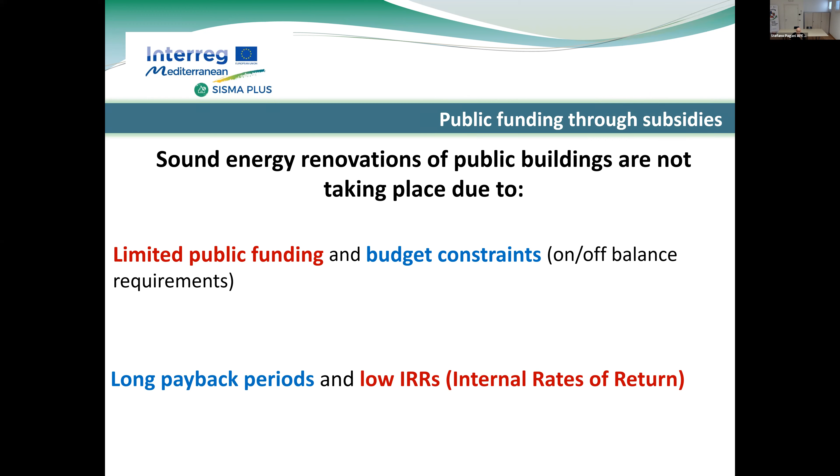And the other fact is that these kinds of investments have very long payback periods. It takes a lot of time to get your money back, and they have very low internal rates of return. So...

Our approach here is to try to tackle this problem from a different perspective, from a new point of view. The thing was, what do we need? The question is, what do we really need to make things happen? This involves another question: project feasibility.

What does it revolve around? It revolves around two things: bankability and profitability. In other words, when certain ECMs - energy conservation measures - are carried out on a building, such as external insulation of the envelope, window replacements, insulation of the roof, and so on. These are the basic things.

This obviously costs money, right? This implies a certain expenditure, and that expenditure at the initial period will then yield savings over the years. We will spend less money on heating. Therefore, in financial terms, a trade-off has to be made between the amount you have to initially spend to carry out the investment, and the savings over a long time. We have to sum up all the discounted amounts of money we're going to gain over the years and see if it's larger than the initial investment.

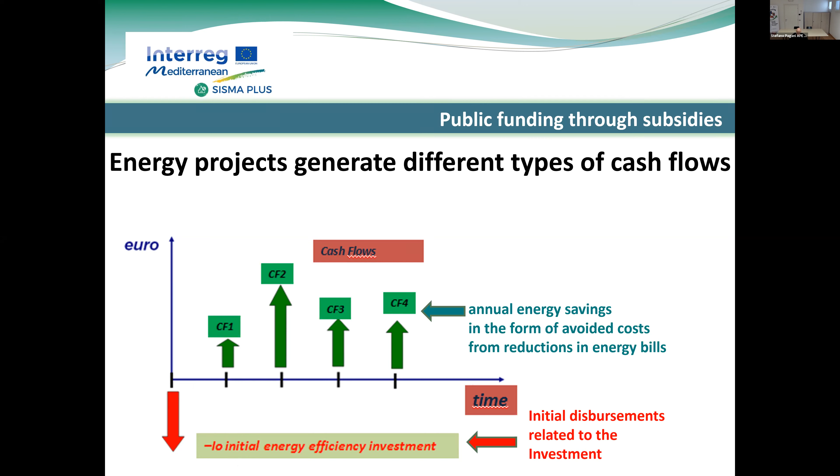So what you have to compare is your initial investment, a negative sum. Let's say you work on a school or a hospital and you spend 500,000 euros, so it's minus 500,000, that's your initial investment. Then you have savings for 15, 20 years, and you have to compare that. All these savings will be discounted at a certain interest rate, and you sum up all these discounted cash flows, actualized to today. That sum has to be larger than the initial investment. In that case, it'll be yielding a positive interest.

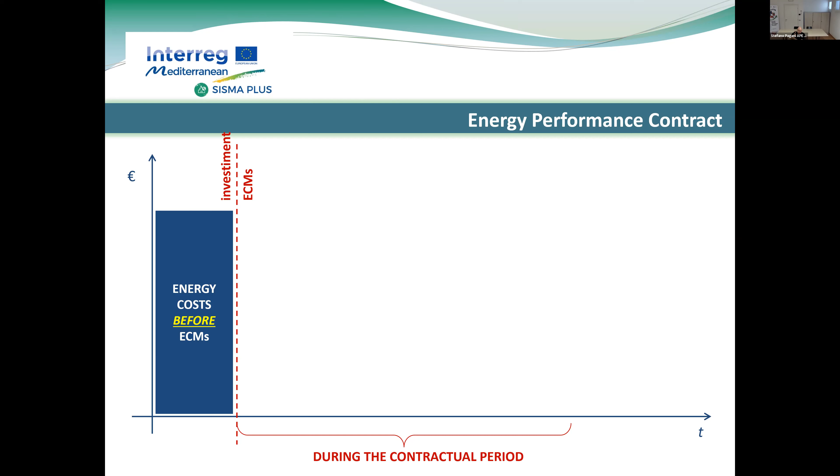But this is done within a contract where somebody, like a municipality or a public body, will award a tender, give a grant, a subsidy, and the bidder, which can be an ESCO, an energy service company, or even a builder. What do they do? They receive the grant, they receive all the savings for 15 or 20 years, and in return they will carry out the measures, going into the building and doing what has to be done.

So basically, as you can see, there will be energy costs. After the ECMs have been carried out, energy costs obviously go down. These are the annual cash flows, the savings, which will be awarded to the ESCOs or the service provider, because the municipality or hospital was previously paying this amount, the energy costs shown here.

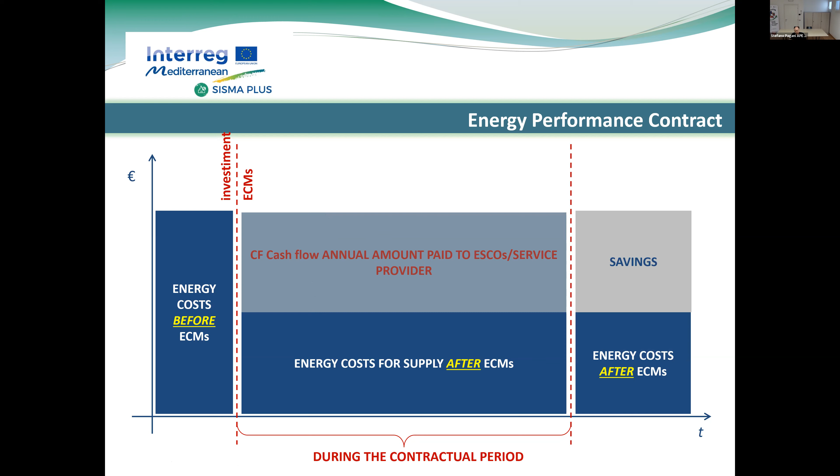It keeps on paying the same amount, only that this area, which is the amount saved, will be passed over to the ESCO. Once the contract has expired, obviously these savings belong to the public body. So this is how the mechanism works.

At this point, I'll try to explain what is the idea behind the subsidy, what is the economic idea in detail regarding the subsidy. So let's say that you have to carry out, or you wish to carry out, a certain initial investment on a building for a sound refurbishment in terms of energy of the building, right?

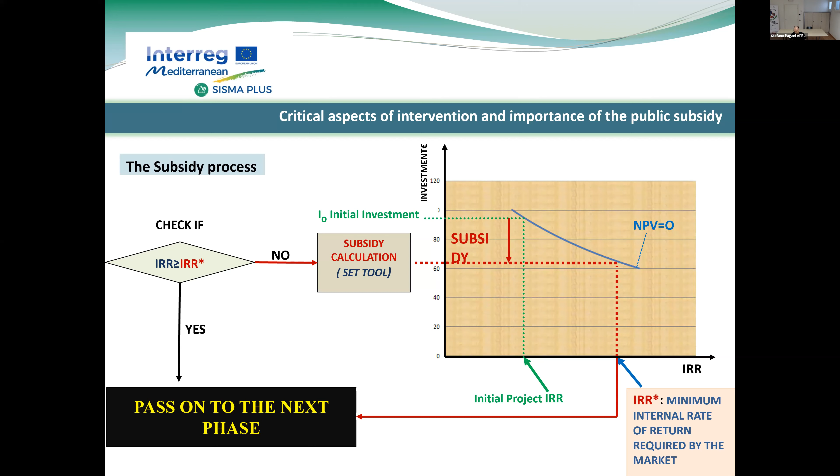Okay, now, I think this is what I really wanted to point out. I'll go through the technical stuff rather quickly now before passing on to the presentation of the tool itself. The Excel tool, as you will see, works rather well, because what is needed is a tool that can provide you with a figure. In other words, if I want to do a certain kind of intervention, how much will it cost me, and what should the subsidy be? I need a figure. If the cost is 200,000 euros, how much must the subsidy be? Let's say 40,000, 60,000, it doesn't matter, but I need a tool that can give me an idea.

Theoretically, to make the whole system work, what is needed basically is that, to make a project bankable, we need to standardize all the processes. In other words, the investor needs to be assured that on the technical side things have been worked out, and that the whole process, and therefore also the tendering process and the technical requirements, are as precise and standard as possible. Because public bodies and investors all want to keep risks very low.

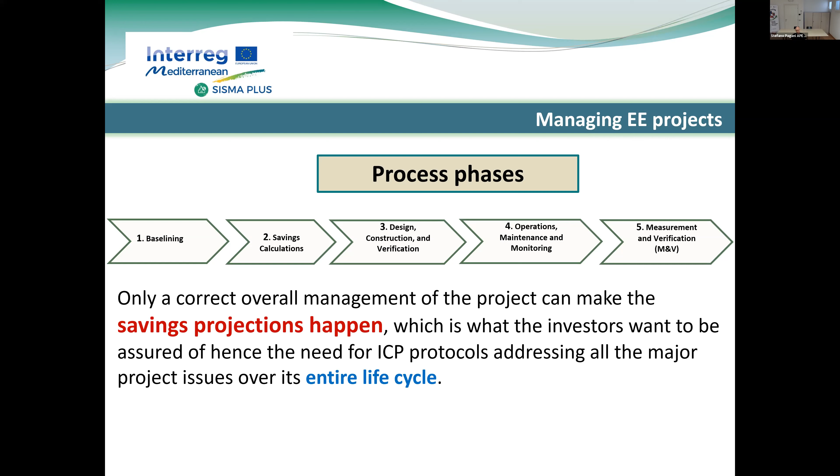And then there's another thing, measurement and verification. In other words, a third party is needed, because on one side there's a public authority, a school, a municipality, and on the other side there's a private company, an ESCO, and the savings which are generated each year have to be verified by someone who is a third party to both. This is the whole vision of the project over its life cycle.

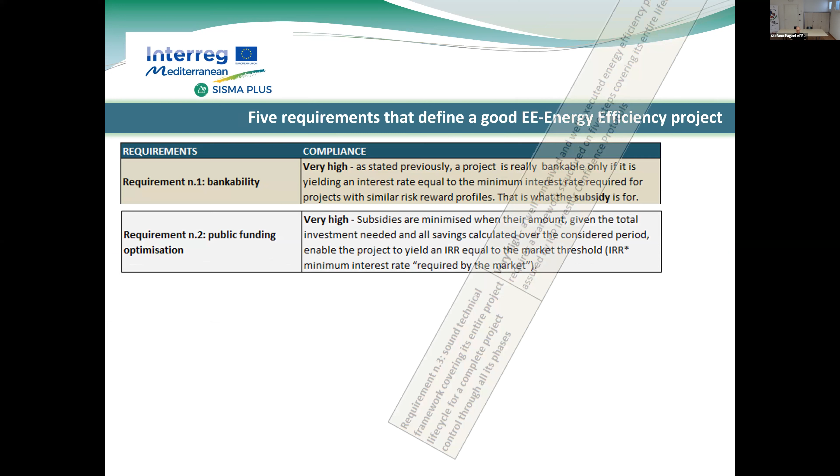Now, these are the 5 major requirements, so I won't go through them in detail, you can keep this for extra details if you want. But basically, as I said before, there has to be bankability. That means the project has to yield an interest rate similar to, or reaching, the minimum interest rate which is required.

Then the other good thing is that this enables public funding optimization, which I mentioned before. So we will not be giving out subsidies on a flat rate basis, maybe 100%, as often happens, but every case can be analyzed, and in this way we can really maximize the number of interventions you can make.

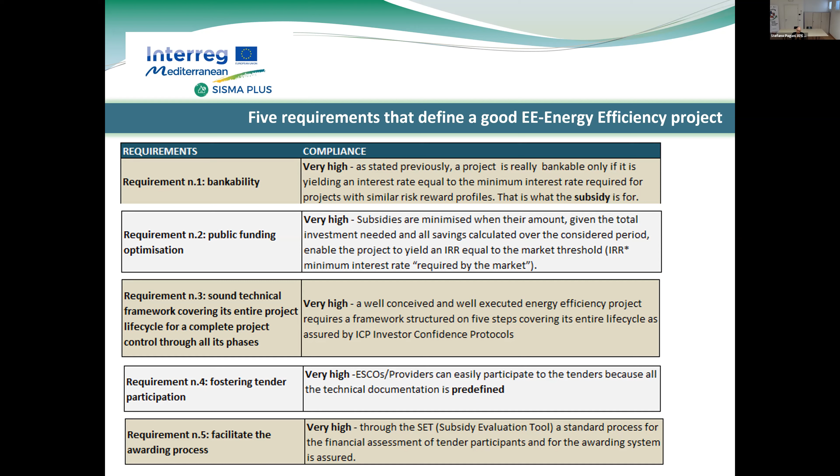Then we need a sound technical framework covering the whole project life cycle, as I said before, starting from the baselining, ending with the measurement and verification of the savings, so that investors on one side and public authorities on the other are assured. This means there has to be someone who's going to design, make the blueprints, and work out all the technical construction details. And obviously the system works well if it's easy to participate in the tender and if it's easy to award the tender, because this is interesting, this is next.

Okay, these are the milestones of the process.

With the Excel tool, we work out the subsidy. What do we do next? Let's try to get a short, quick presentation of how the whole system should work. First, you work out the tender, you work out the subsidy with the tool, and this can be done by the public authorities or the municipality on their own. The tool has been made to be very simple. You don't have to have a great technical capacity to use it.

That's the first thing. Then this is ICP, investor confidence protocols. This is tender 1. There will be a first tender, which I call tender 1. This tender is needed to get the technical documentation—the design, the blueprints, all the details on material and construction. Why is this very important?

Because once we've got this, the bidders, the companies, the people interested, don't have to work hard to put together an offer, because they're going to go online, basically on the platform or website, and download the whole technical documentation where everything is specified.

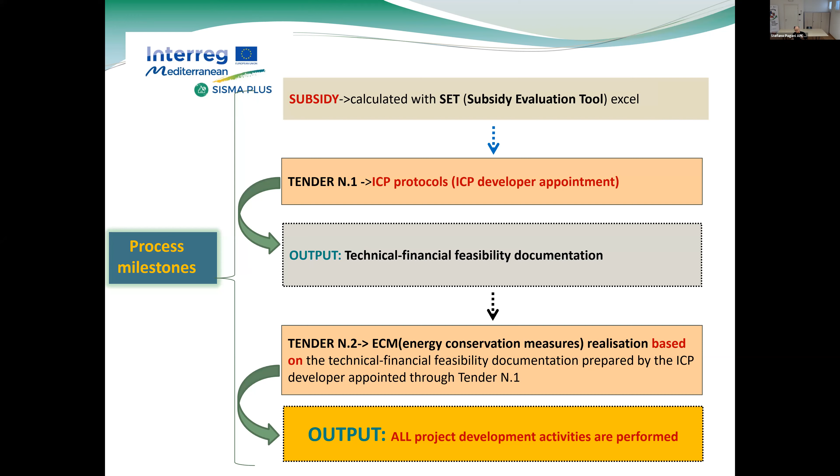So basically, all they have to do is work out what their costs are, and see if, on one hand, the cost of the investment for the bidder, and on the other, the subsidy plus all the savings, are convenient enough for them—and eventually work out what kind of discount they can apply.

So I'll skip this—I think that's enough. I know it's a bit complex, but I hope I've been able to give you the theoretical approach. I think we can pass on to the tool now, which is the interesting part.

Just a moment, I'm trying to open the other file. Okay. Right. So, do you see it? Can you hear me? Yes, yes, we see and can hear you. Okay, all right, sorry. Stefanos. Okay, okay, so, okay, now.

First, we've just seen what the subsidy is about, basically. I want to repeat myself once more: the subsidy is the amount of money needed in order to make a certain investment yield an interest rate. In other words, the savings this investment yields, compared to the amount of money we have to spend to carry out these energy conservation measures, will enable the whole project to give an interest rate which reaches the minimum required.

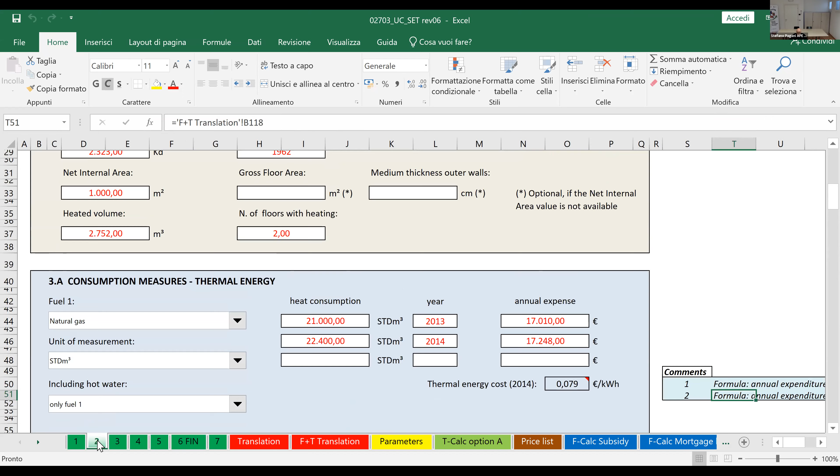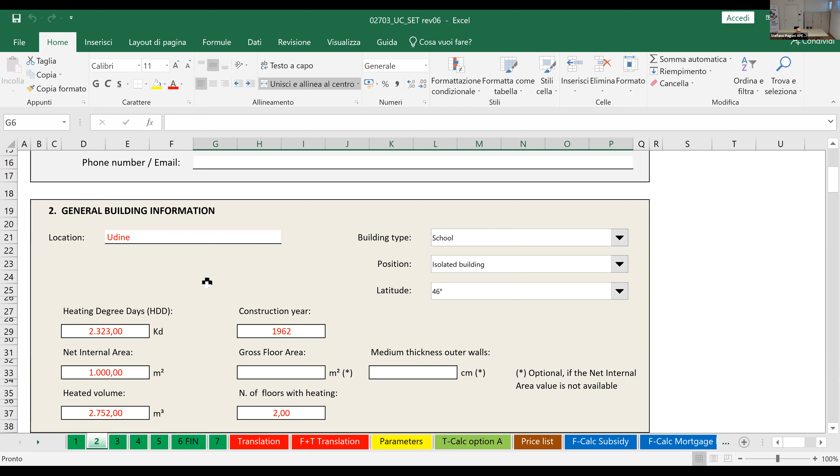Okay, so what do we need to do? Well, first of all, you write in the basic information regarding the building, so kind of building, public school, whatever, the address, the owner, and so on. And then you start filling in some information on the building. So I wrote Udine, because that's where we are based, and you can choose from the buildings we have: a school, a gym, offices, and a healthcare structure. Let's say we choose a school, okay?

The position then, if it's a building, isolated means it stands alone with all 4 walls exposed, or it can be semi-detached, or both sides semi-detached. It can be closed within 2 buildings and so on. So you start pointing out basic stuff: the type of building, if it's, let's say, an isolated building, and then you select the latitude.

This is for the heating degree days, and where it's positioned, for also the influence of the sun. Okay, once you've done this, what do you need? You need your heating degree days, and depending on where you are, this kind of data, everybody's got it. It's not difficult. You need the construction year of the building.

What is needed is the net internal area, or if you don't have that, you can use as an alternative the gross floor area, and then the medium thickness of walls. This is optional. The heated volume, and the number of floors with heating. So now, basically here, what are we doing? We are saying, this is the building, this is how it's positioned, these are the heating degree days, and we'll provide information on what the area is and the number of floors.

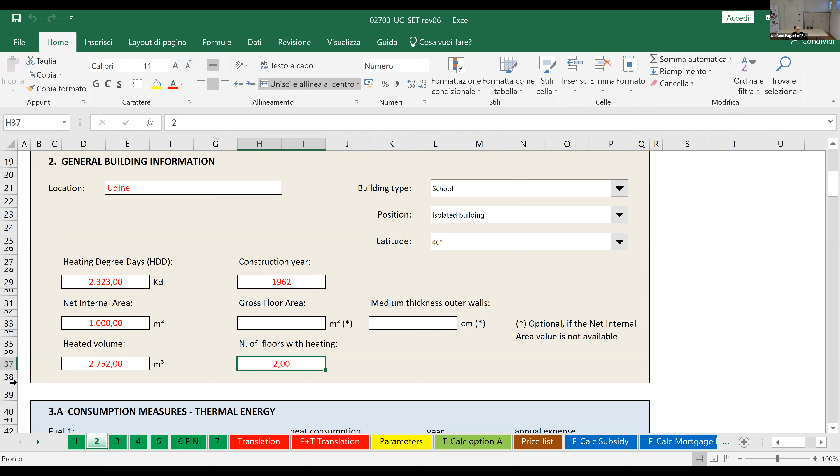So once you put in this basic data on the building, you pass on to the consumption data. In this system we have up to 2 kinds of heating boilers considered. Usually there's one big centralized one, but this system is prepared for 2, so you can even consider an extra one if needed, if it's in the building.

So you can choose, here you have all the kinds of fuels, let's say natural gas, which is the one we most use over here. Then the unit of measurement, which is standard cubic meters, and you therefore have the heating consumption.

Where do you get this information from? From your bills, basically. So what you need here is bills, but everybody pays the energy bills, I hope. It's a bit of an effort, but not too much. You can usually get this information from the accountancy office. These are just figures I've put in, the year and the annual expense - you get these from the bills.

So now you're starting to work out very basic information. Just one thing I'd like to point out: the unit of measurement - if the bill regards natural gas and comes in standard cubic meters, you select cubic meters. Everything can also be expressed in kilowatt hours. But look at the figures, 21,000, 22,400 - if I shift, they stay the same. In other words, you should choose the unit of measurement that you have on your bill.

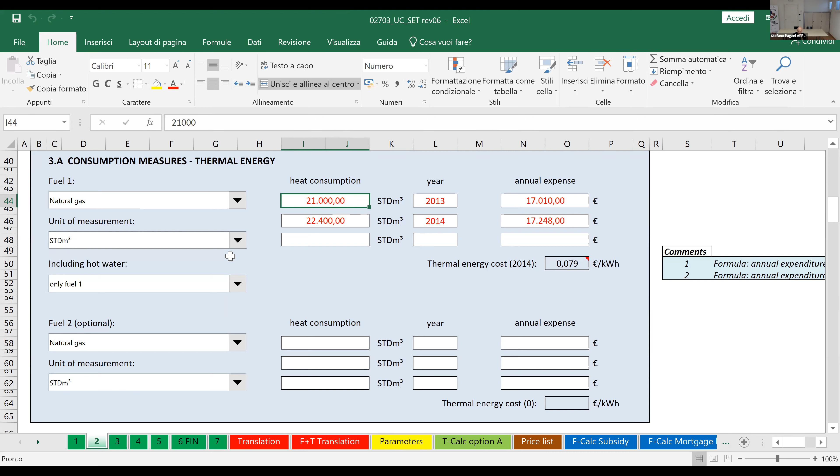Anyway, the rule when using this is basically: fill in the unit of measure that is on the invoice, on the bill of your fuel provider. And then energy measures regarding electricity - this is the electrical consumption, also from the invoice and from the bill. So as you can see, this is very, very basic information.

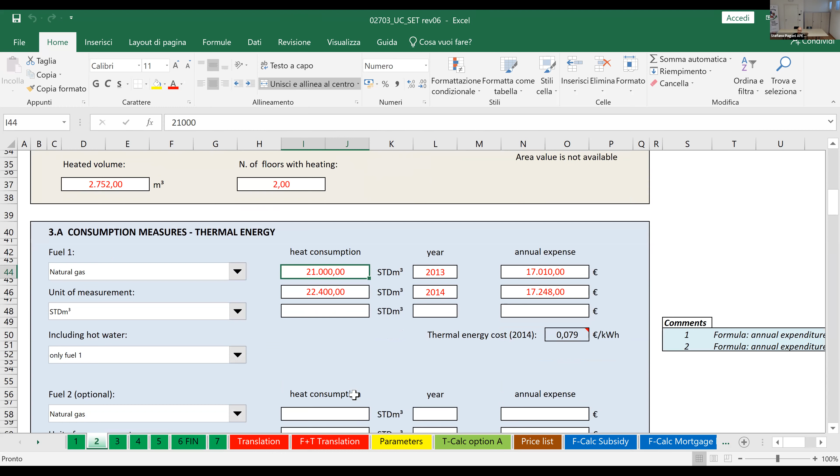But at this point, what we've got is we know the type of building - is it a school, a hospital, offices? We know the year of construction, and therefore we have standard kind of data regarding how the buildings in that area were built. We know the area, we know the heated volume, and we know how many floors it has. So we have the basic geometry, and we have what the consumptions are when it comes to thermal energy and electrical energy.

So at this point we can logically pass on to the third phase. What do we do here? These are a set of options, right? This is prepared.

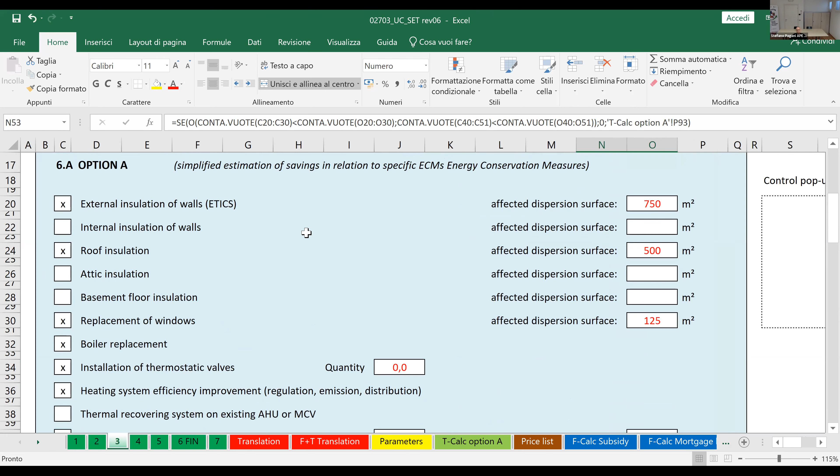Okay, now you see, at this point you have to choose between two options. What are the two options?

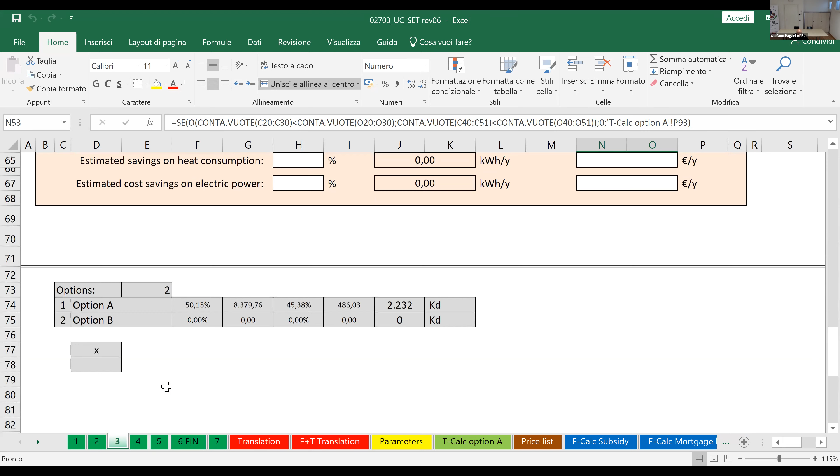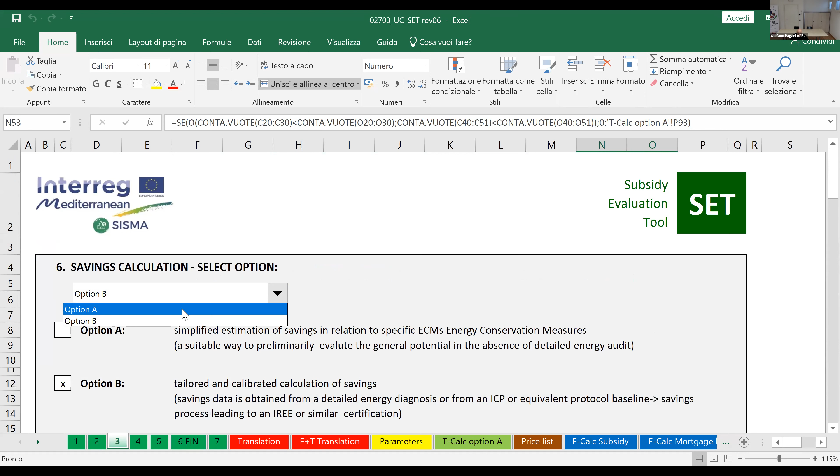Option A is the simplified option. Option B means that, in this case, you've already done an energy audit of the building. You know what you want, you've measured everything, and you've made your calculations, so you skip option A and pass straight on to option B, and you fill in option B with this basic data over here. Because you have it. But we're not interested in that at the present moment. What we're interested in is option A, because as I said, we want to make a simplified estimation of the savings.

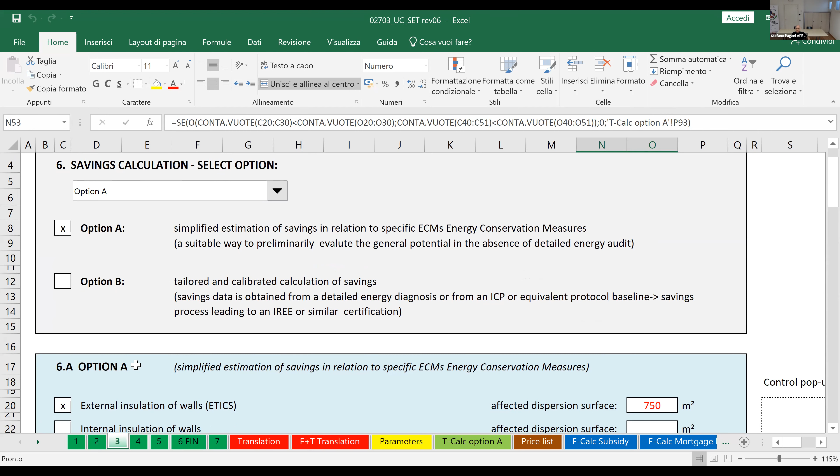That derive from certain energy conservation measures, okay? In other words, what do we want to do? So usually what we consider really is, and you can see them, like external wall insulations. You go here and you say, I want to do it or I don't want to do it. So let's say you select it, you can deselect it or you can select it. You select it in this way, it's very simple. And then you see this number over here, this is the affected dispersion surface, the area of the external insulation.

First question: why do I have to write in a figure if before, over here, I've filled in all the major information on the building and I have a standard geometrical surface? Because if you don't fill anything in here, it'll automatically use the one provided as a standard. But if instead I'm lucky enough to have a precise measure on a certain surface, I know it because I have a blueprint, because I've done some kind of work on it. In other words, I know that figure, well, you can write it down. If you write it down, this will make the whole thing more accurate. You don't have to do it, but it'll help.

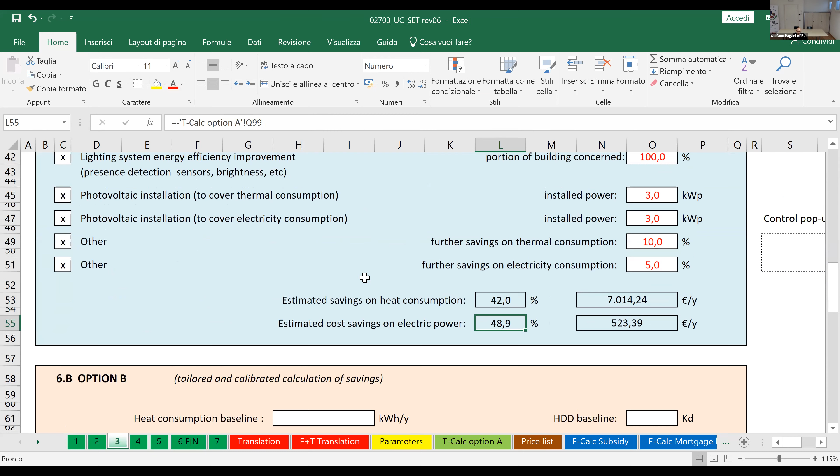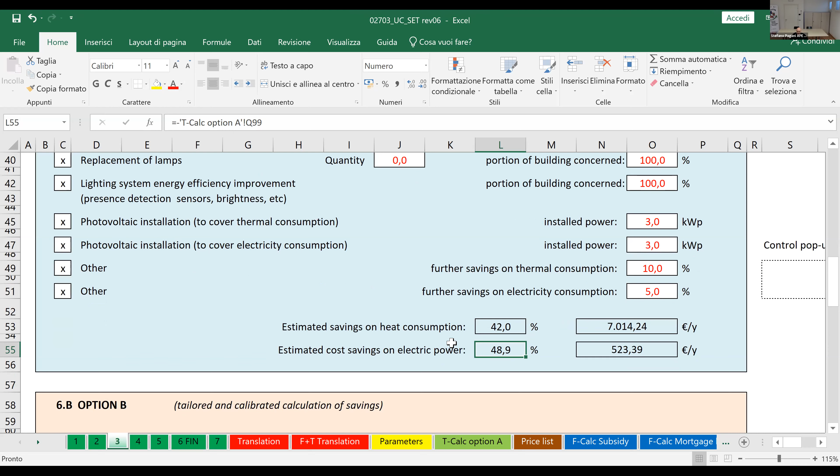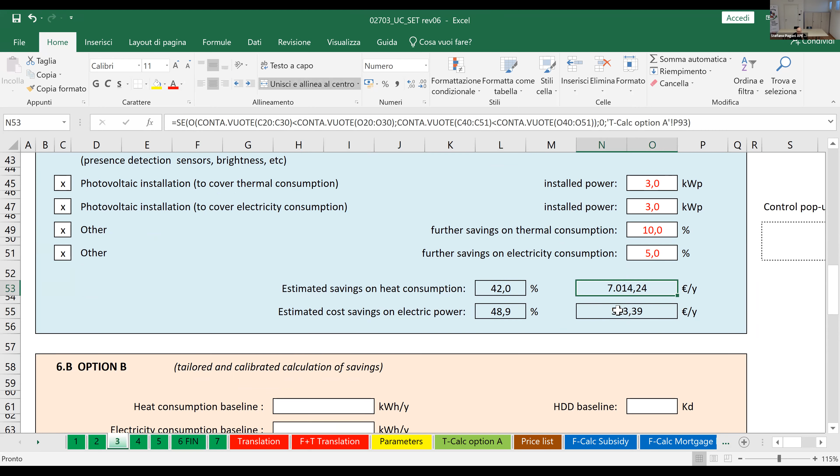So basically here, carrying out all these interventions, selecting the ones we wish to consider. Usually the major ones are envelope and standard stuff like thermostatic valves, and maybe replacement of lamps. This says the amount of energy in percentage that will be saved, with the distinction between heat and electricity, and this is the amount of euros per year.

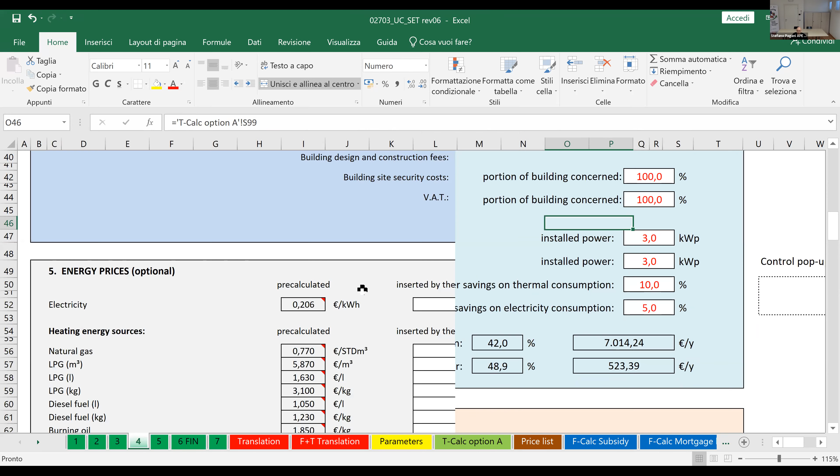So now we've got the savings. Page 4, so now we know what we want to do, and all the interventions we have will show the estimated cost.

You see, these are the costs, because after we've chosen, for example, external insulation of walls, as you can see, they were chosen here and ticked — roof insulation and replacement of windows. When you go over here, these are the costs.

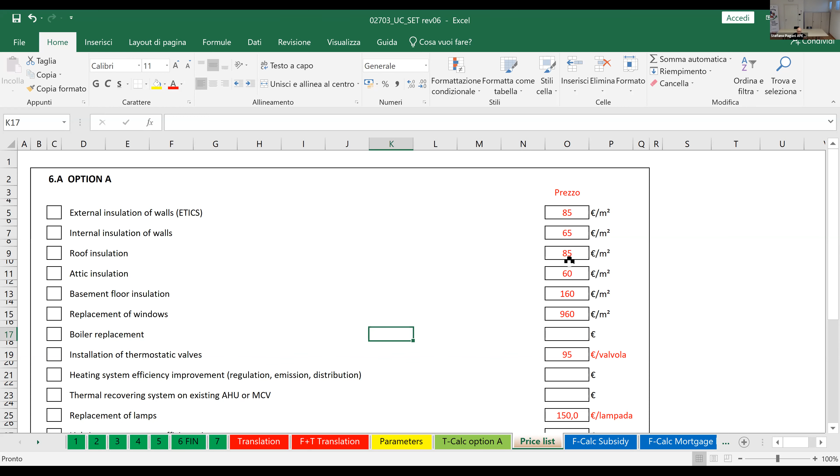How do we know the cost? Because there's a thing called a price list, a sheet done by the public bodies because they know the price for external insulation, internal insulation, roof insulation, the cost of everything per square meter. So the system makes a multiplication of the price per square meter and gives you the estimated cost. It's very basic and logical.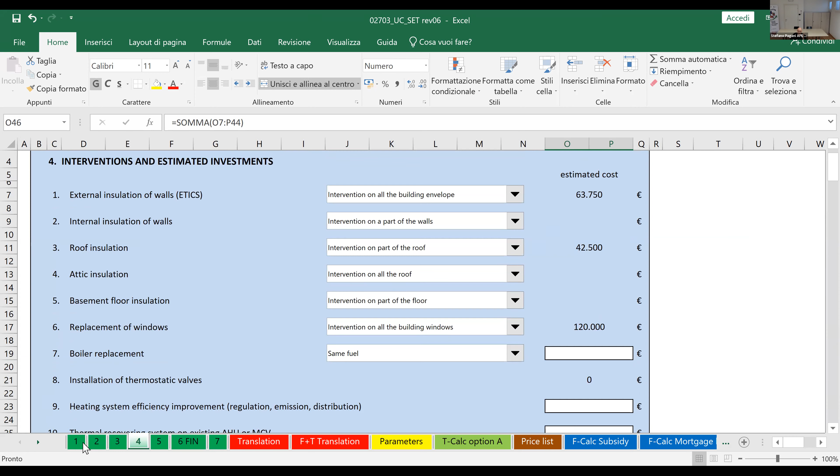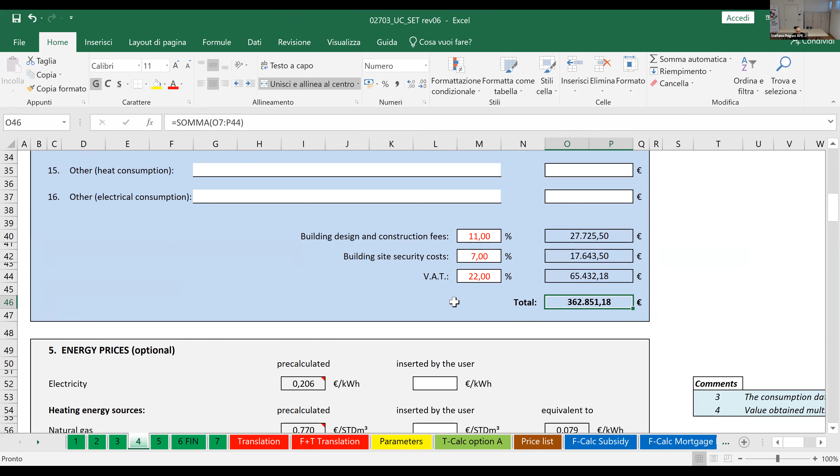So you first put in the basic data on the building, then you choose the kind of intervention you want. Then what do you get? You get the costs. You add building security costs, and you get the total amount of money you need in order to carry out this kind of investment.

Okay, what is missing? The subsidy. Where is the subsidy? The subsidy comes on page 5, because now we know that, for example, in this case, this investment will cost us 297,000. This will yield 7,000 euros a year in heat consumption savings and electricity. Total savings 7,000 — as you can see, they're not big numbers compared to investments.

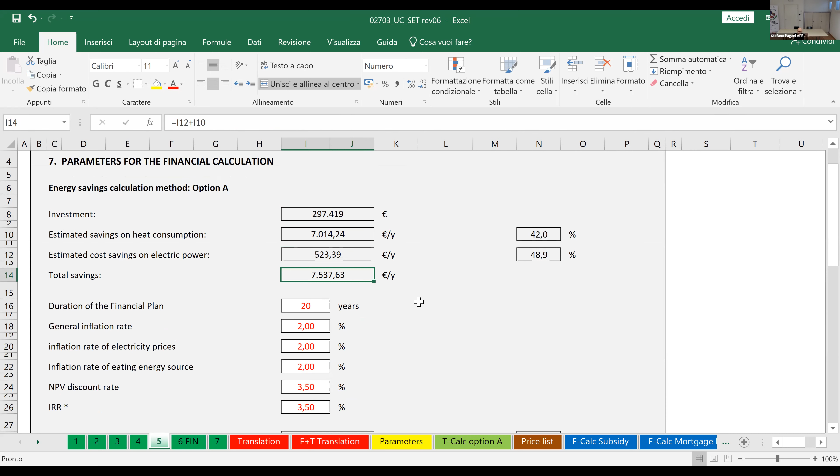And if the financial plan has to last 20 years, the general inflation rate can be even 1.5%, for example. This is the general one, and this is the one for electricity prices. We can keep it at 1.5 because of the inflation rates of other heating energy sources. This is the discount rate.

The discount rate is the interest rate we use to discount all the cash flows coming from the savings. And this over here is the internal rate of return, the minimum amount which is deemed required by the market for this kind of investment. Let's put it at 4%.

As you can see, the subsidy goes up. In other words, if the minimum interest rate is, let's say, 3.5%, because interest rates are very low, the risk is very low — this is a general condition. The subsidy needed here in order to make this intervention yield this rate is 175,000, equivalent to 59%.

If the interest rate goes up, what does that mean? The subsidy has to go up because you have to spend less in order to gain more. So let's say 4%, as you can see, 181,000, equivalent to 61%. If it's only 3.5%, for example, it's 59% and 175,000.

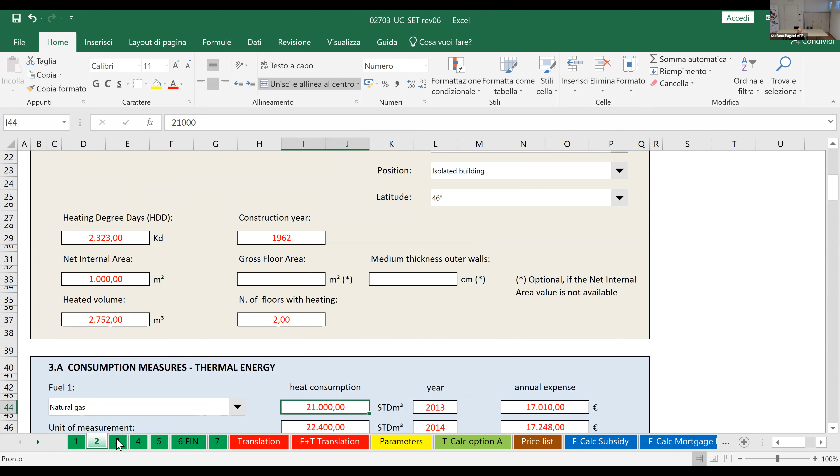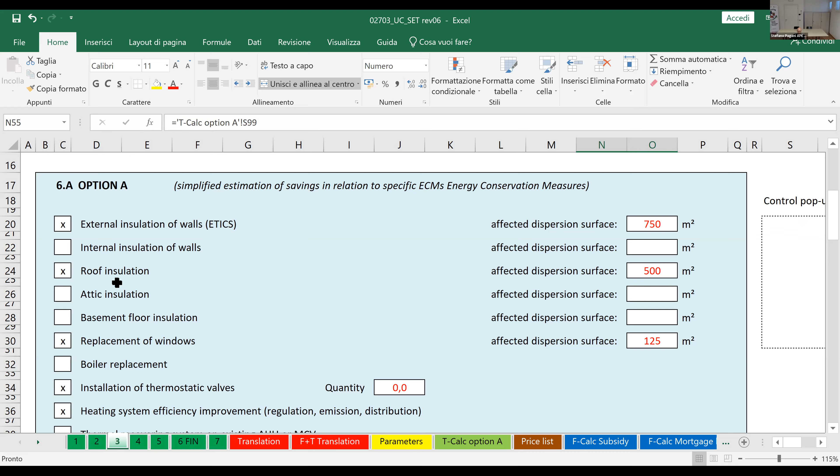So you fill in the basic data of the 10 buildings — internal area, heated volume, number of floors, this basic stuff. You don't even go there and make measurements, you keep it really simple. Part two, you consider, in this case, what I would do is consider only external insulation, roof insulation, replacement of windows, thermostatic valves, replacement of lamps, and lighting system efficiency — I'll take this, you can take this, though this is a bit more complicated.

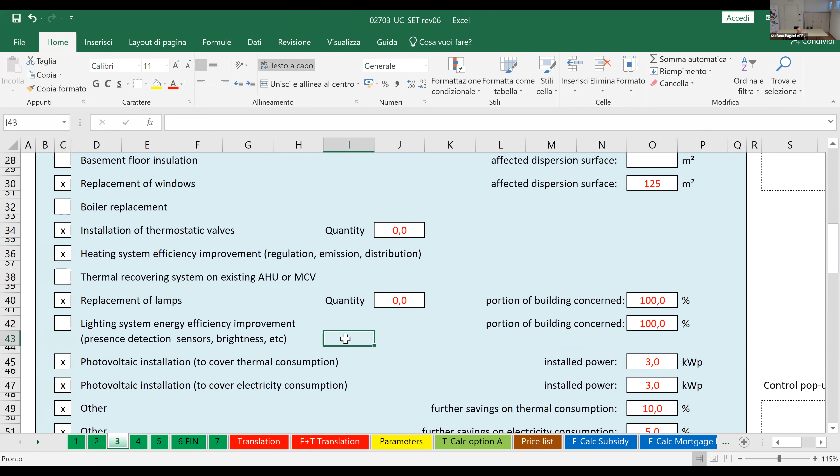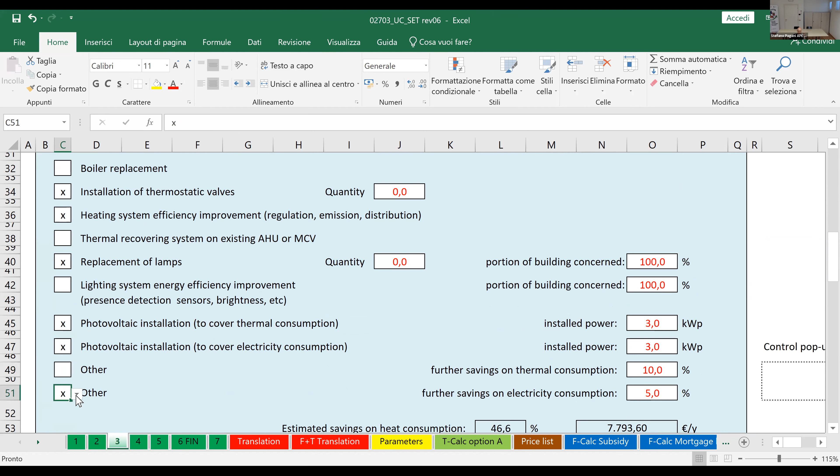Photovoltaic installation — you can consider to put a bit of PV on the building, or you can take this away, and you can take this away as well. Now what do you get? You will get a certain subsidy.

So what you can do here, you can consider the subsidy needed for 10 buildings in order to grant you this internal rate of return. Subsidies will change, this is fixed — every project has to yield, has to provide 3.5%, compared. So what will change is the subsidy. You can start to make a ranking of subsidies, for example, this subsidy here is 163,000 euros.

Say you get 1 million euros from a national authority to do this, you will start ranking what are the most convenient interventions, in other words, which buildings enable you to maximize the saving of energy at the lowest cost and maximize the investment. This is a way in which you can start to analyze different buildings in a rather quick way. If you have lots of buildings and not lots of money, and you have to make a choice, this is the first estimation.

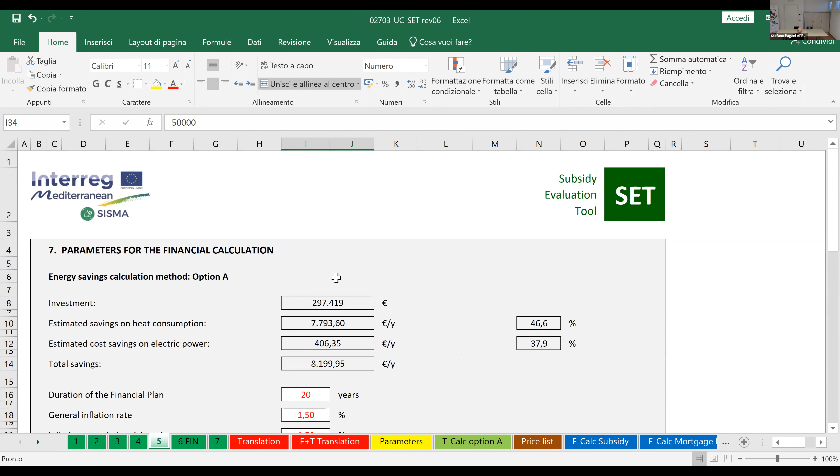This instead is interesting because it regards the company financial data. The company has to fill in this data. This whole operation, this intervention, costs 290,000, nearly 300,000 euros, okay, 297,000, and the subsidy is 163. So the remaining part, you can fill in, you can ask for a loan in order to cover it, or the company can put a part in own capital and a part with a loan.

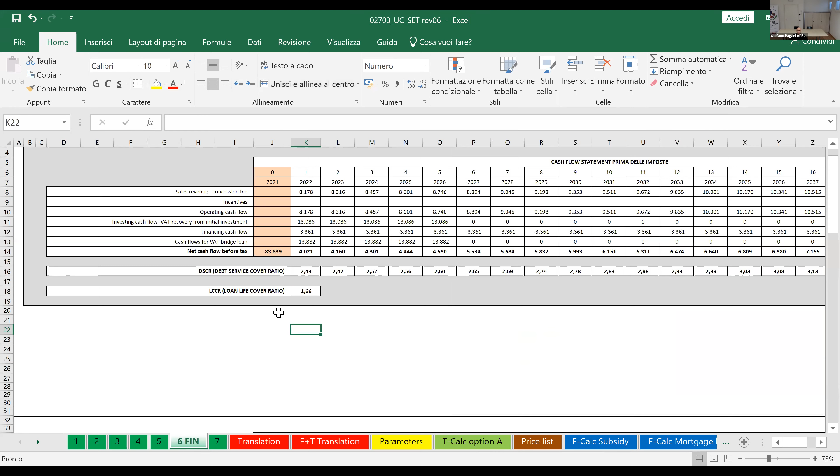Since it's all filled in here, you get the VAT bridge, but this is just a special loan for the VAT technical figure, I wouldn't go through it right now. Basically, this enables the company, now we can't see this very well, to see what the cash flows will be, and to carry out a first kind of financial analysis.

But this can also be important for us, when I say us, I mean the public authority who's in charge of carrying out the policy. This can be interesting because we also know on average what loan amount is required. Basically, in Italy, it's declared that usually 60% of these operations, the private companies, the ESCOs, the building companies, will ask for a loan. The loan will cover 60%. So if the cost is 100, it'll be 100 minus the subsidy.

Let's say the subsidy is 30, so you get 70. Of that 70 that is needed, 60% will be provided, let's say usually at the average market rate by the loan. The period of the loan is, let's say, 20 years, and the annual interest rate required for this is, let's say, 4%. Then when I pass on to this, I'll find what the cash flows are, and I'll have an insight on the financial sustainability of this.

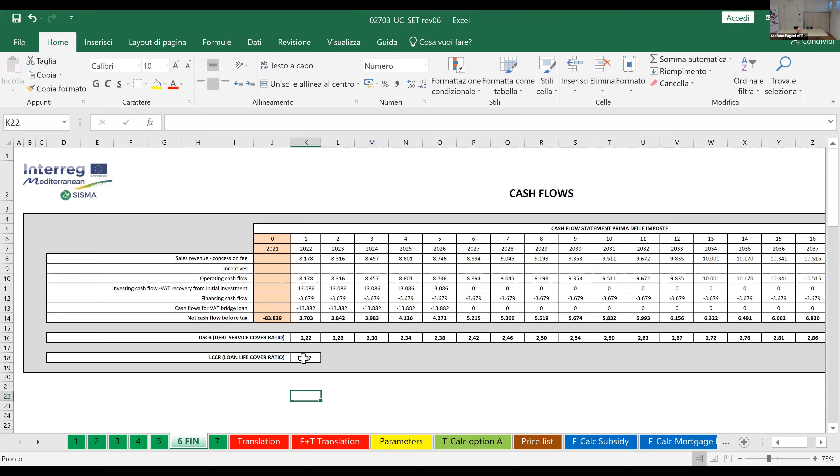Now, one could say, but who cares about this? No, this is interesting because it enables, at a policy level, to put together the subsidy amount, and also to make a general simulation to see if combining the subsidy with the loan amount companies averagely borrow from banks and the cost of the interest rates required, the cash flows generated are okay and make this project financially sustainable. So this can be used for a general policy, which is good, and can also be used, as explained in the tender, by the companies themselves for a quick check.

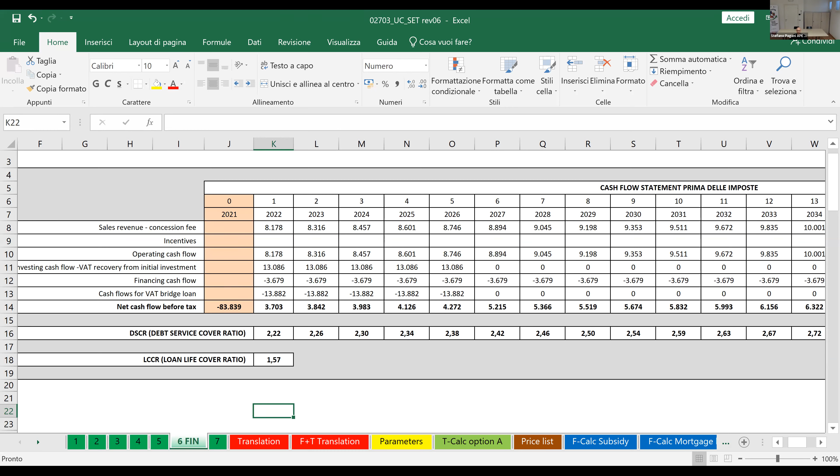So I'd say that's the whole tool. I think that's enough because otherwise it will be too much in such a little time. Please, if you have any questions or whatever, don't hesitate.

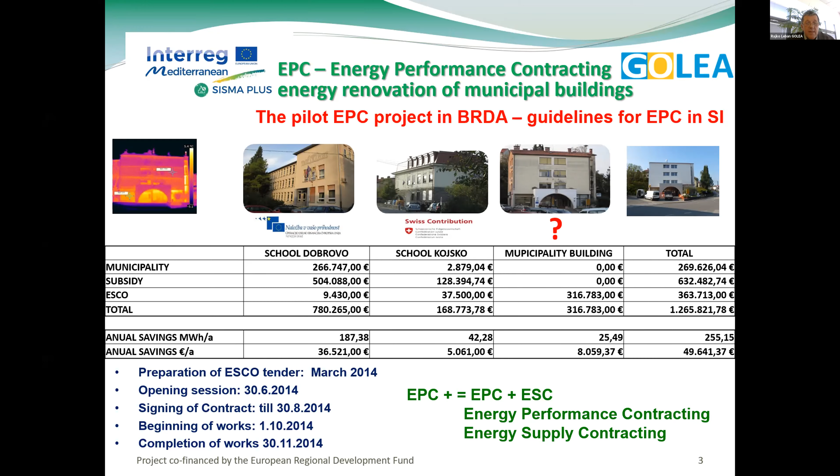It's very important that the contractor guarantees energy savings until the end of the contract period, in this case 15 years. The guaranteed savings are shared 90-10 between the contractor and the municipality. Stefano showed us before that 100% goes to the ESCO to pay back the investment, but in this case it's shared 90 to ESCO, 10 to municipality. The excess savings are shared 50-50. If the contractor does not meet the guaranteed savings, it's charged to the contractor, who pays a penalty.

Following the pilot project in Brda and the national guidelines, many energy performance contracting projects were carried out in Slovenia. You can see on the picture where municipalities are overtaking the central government in the energy renovation of public buildings. You know that EU directive says that government should do this and this, but in Slovenia, municipalities are overtaking the government.

In 2014 to 2015, there was no call. You can see on the left side, no renovations. Then they started again on the basis of the new guidelines I talked about before.

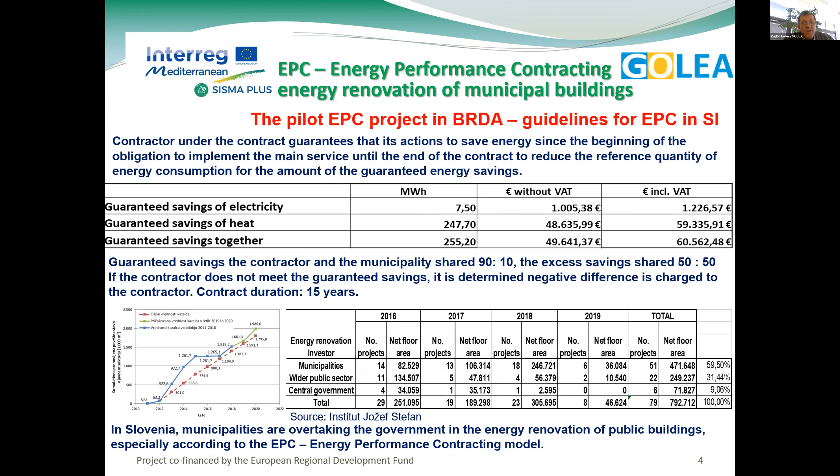This is a joint analysis of calls and public tenders of the Ministry of Infrastructure. This showed us that in the years 2016 to 2018, more than 600,000 square meters of public buildings were renovated. As much as 76% of this is in the form of public-private partnership energy performance contracting, where the eligible costs were more than 100 million euros. Average savings are 86 kilowatt-hours per square meter per year in public-private partnership.

And only 68 kilowatt-hours per square meter per year at public procurement. Eligible cost is lower at public-private partnership, only 170 euros per square meter, and on public procurement more than 225. So private investments are also more efficient than public ones, and this is also the point of energy performance contracting.

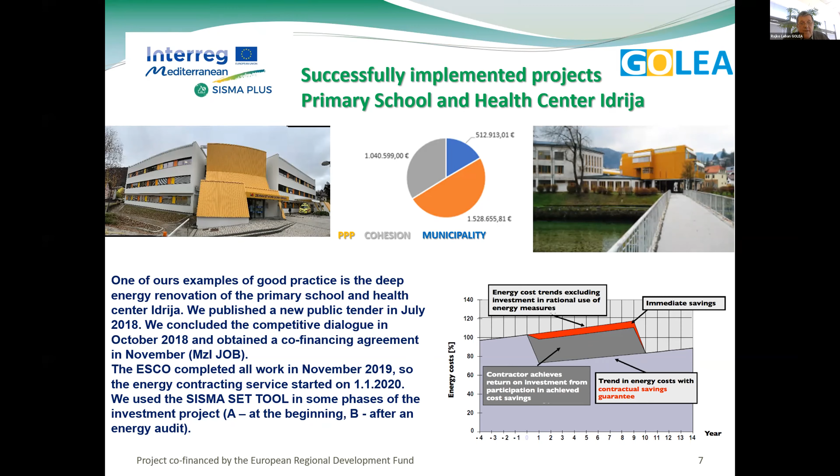Our last case, at the secondary school center in Nova Gorica, we considered 4 deep energy renovation buildings, but the calculations did not indicate that the project could be interesting for ESCO. So we added 50 buildings with interesting measures for ESCO with short payback period, and the project is now moving forward to energy performance contracting, the project became bankable.

So this upgrade was done by the energy project. We can combine more buildings and get the critical mass for private investors.

We also applied for ELENA technical assistance for the preparation of the project, where we had to unite many small municipalities in order to achieve a successful investment plan worth 45 million euros.

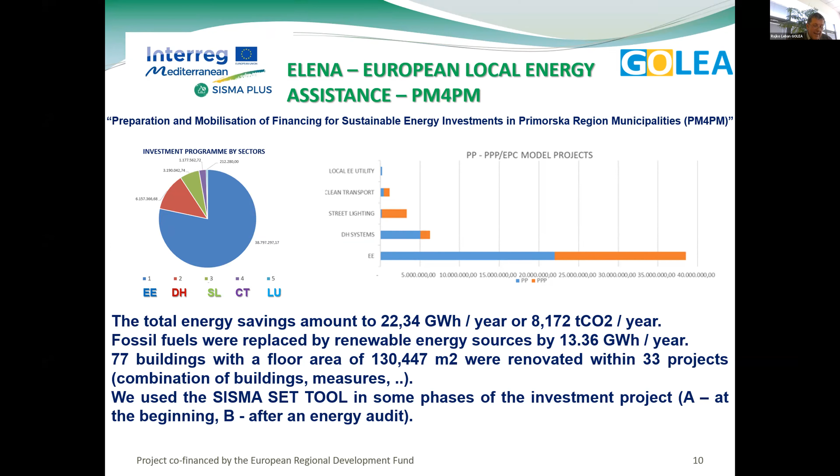This is a combination of buildings, more buildings in one project, to find the right combination of measures and target internal rate of return. We use the SISMA SET tool in some phases of the investment, as I said, option A at the beginning, option B after the energy audit.

So let's go to the SISMA SET subsidy evaluation tool. Stefano showed us a very clear Excel file, so I'll maybe say something about the results.

The first practical example of using the SISMA SET tool is the implementation of a quick feasibility test for the renovation of the municipal administration building in Sežana. Previously, we conducted a one-day audit of the building and collected data on the building and use of energy sources, collected the bills, and entered this data in the fields marked in red on the presentation, as Stefano showed before.

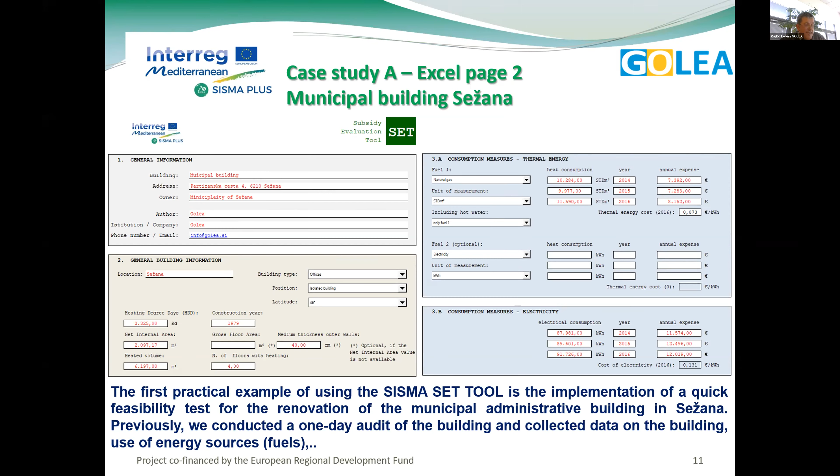Then we estimated the values of energy efficiency measures. This is the old version, so we had to put the investment into the field, but Stefano presented the new version, where in the background is also the standard price, for example per square meter of new insulation and facade. So it's more simplified for users.

And we entered the data in the fields, also marked red, and then went forward.

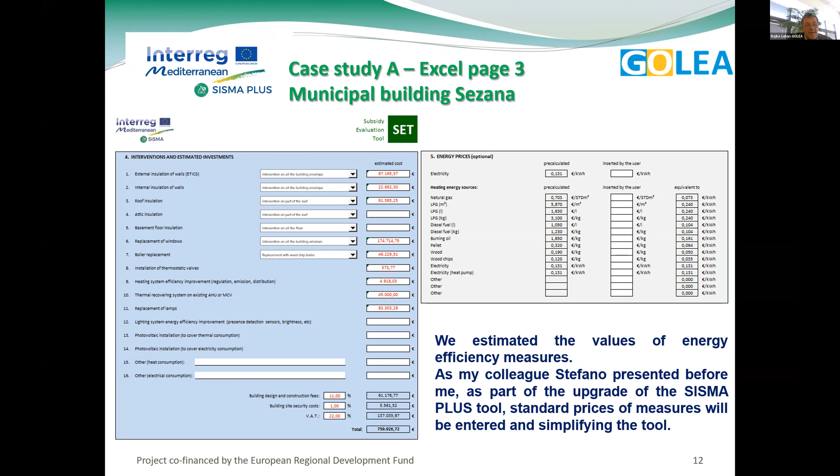Since we did not yet have a detailed energy audit, we selected option A, as Stefano showed, and entered the data in the field for option A in red, as you can see on the presentation.

But in this case, we subsequently made a detailed energy audit later, so we were able to enter the results of the energy audit into the SISMA SET tool. Option B was also filled in, and as you can see, the results are similar.

This confirms that the tool is suitable for simplified project feasibility tests. Here you can see the results of both options, and they are similar. So the SISMA SET tool works.

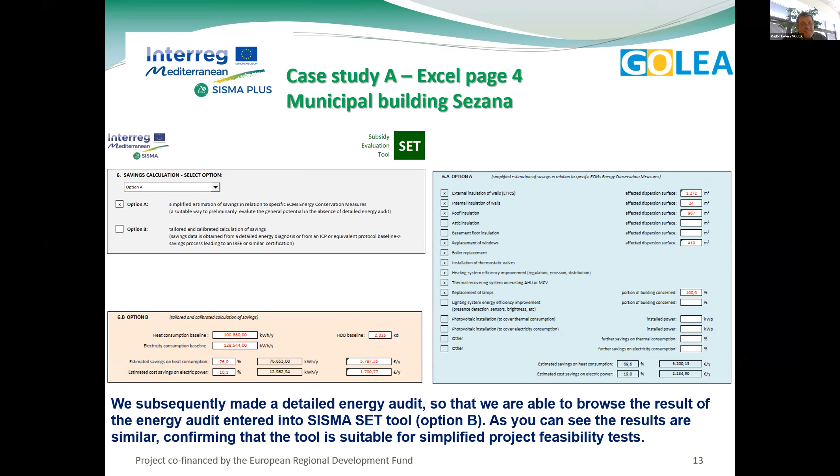Data on inflation and discount rates were obtained from the Institute for Macroeconomic Analysis and Development of the Republic of Slovenia. We considered an internal rate of return of 7%, which is the case in Slovenia for public-private partnerships and energy performance contracting.

This data on taxes is entered for each country, because they are not the same everywhere, so this is filled in on the Excel sheet for each country.

So here are the results, and as you can see, with 49% co-financing from cohesion funds, the cash flow is positive.

When we look for the target values, we go back to sheet 3 and change the measures. Sometimes if we don't reach the goal of positive cash flow, we go back to sheet 3 and combine some measures, as Stefano did before, for example adding photovoltaic, and then we get better results.

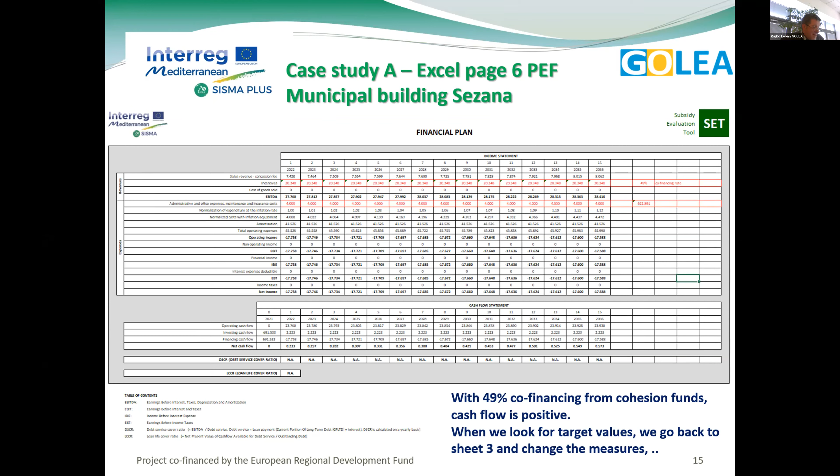If I show this picture, from Stefano's presentation, with the combination of measures, we look for the point of the target internal rate of return. When we get the financial results on the project, on sheet 6, we get the answer on the question: is the project bankable? We go back to page 3 on the list of measures.

We can also facilitate this and look for a more interesting combination for ESCO. After that, we offer this in a call to promoters. So what we are doing in Slovenia, the subsidy is now fixed at 49%.

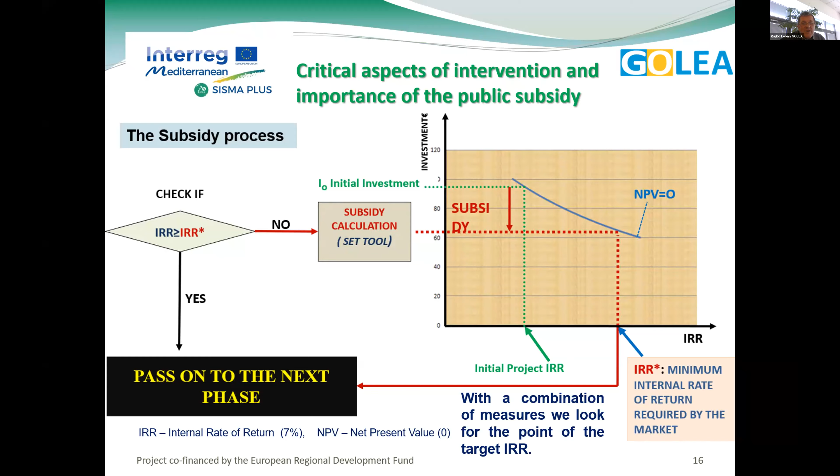The second practical example of using the SISMA tool is the implementation of a feasibility test for the renovation of the health center in Idrija. Previously, we had a detailed energy audit. We enter the data in the fields from the detailed energy audit. In red is all this data.

Also, values are taken from a detailed energy audit and entered into the fields in red, the same in the next sheet. And also, as I said before, data on inflation and discount rates were obtained from the Institute for Macroeconomic Analysis and Development of the Republic of Slovenia. We consider an internal rate of return of 7%, in the case of public-private partnership, energy performance contracting.

And here also are the results. As you can see, with 49% co-financing from cohesion funds, cash flow is positive, so the project is bankable.